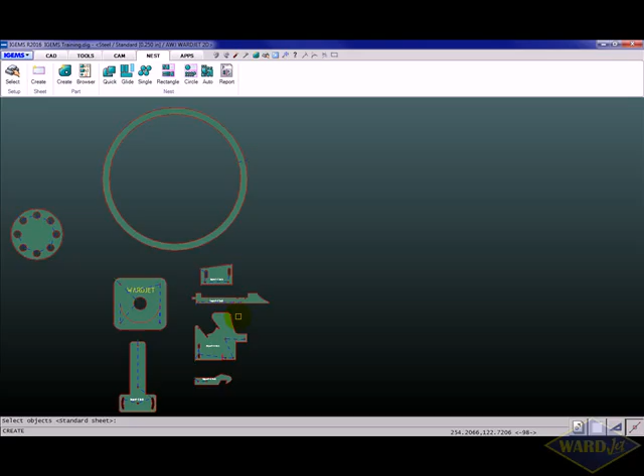Click on create, and down here at the bottom it's prompting me to select objects or press enter to pull up a list of available standard sheets. If I just hit enter, it'll bring up this little dialog box here showing whatever rectangular sheets I've already defined.

If you want to add a new size, just click on the plus sign and type in the dimensions, and then it'll be in that list there. So if we want to use a 48 by 96-inch sheet, we can click on that and OK.

Then you can type in information about the name for tracking it, and collar width, so if you want to leave material around the edge of the sheet to allow for clamps all around the sheet, you can set that there.

This use clamp zones box, if checked, can leave additional material on one edge or multiple edges if you need additional room for clamping. The size of this clamp zone is defined in the machine settings file.

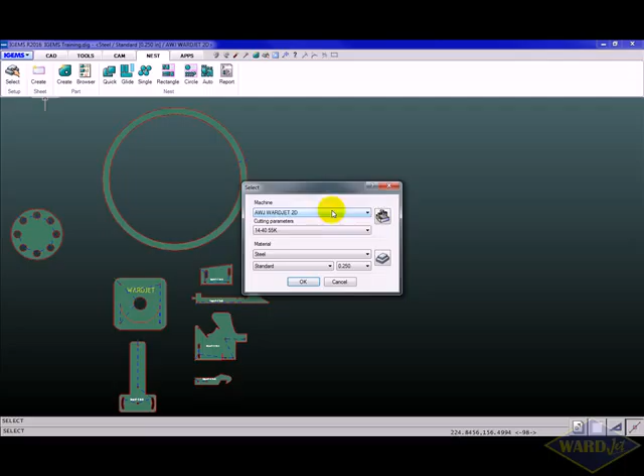So if we just cancel out of here for right now and go back to the machine, click on the machine settings, edit machine button here. On this first selection, table layout, if you scroll down a bit, you've got this area for clamp zones.

If you always want to default to using clamp zones, you can check that box here, or if you typically don't want to use it, you can uncheck it and always check it later. Then you can specify left, right, top, bottom clamping zones. That gives you a little bit more flexibility if you need more room, just maybe on the left and right edges of the sheet for clamping.

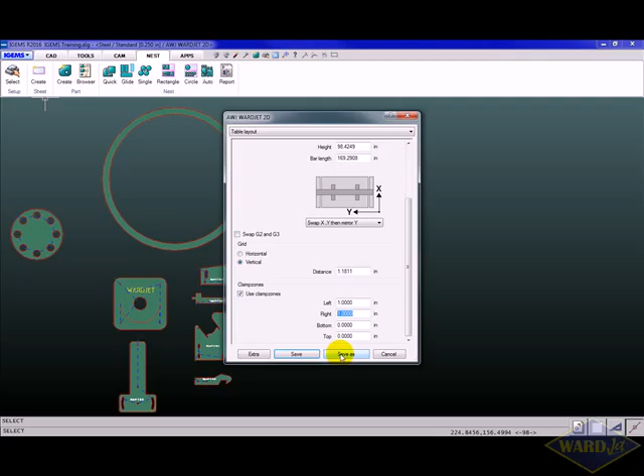So that's where that is. If we go back to our create sheet again, hit enter, 48 by 96 sheet. So collar width, we talked about clamp zones.

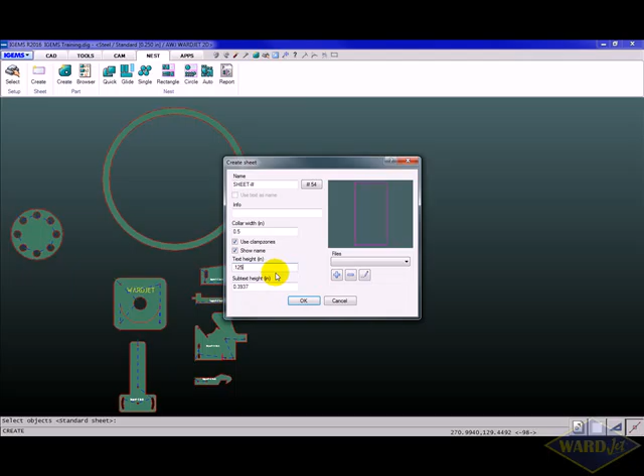Show name, it'll use this name when it does the nest, and you'll be able to see it on the screen so you can identify which is which. Then you can set the size of the text that it shows there. Then you can just click on OK, and now it's showing the sheet.

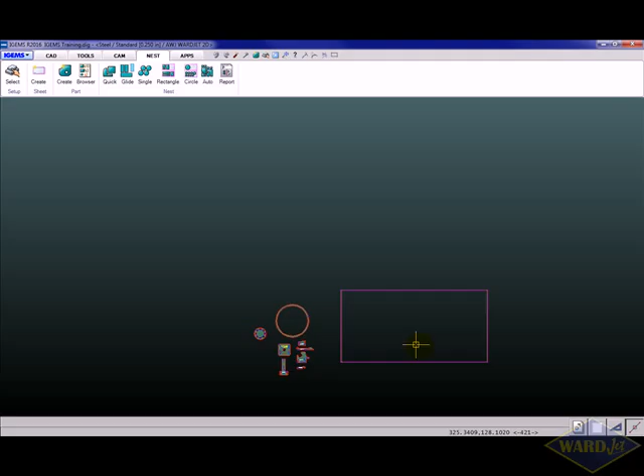If I left click, and then move my mouse around, it'll change the orientation of the sheet on the screen. You generally want this to correspond with how it would be laying on your table. So I'll just left click at this point here, so the sheet will be left to right on the table. That's one way of defining a sheet.

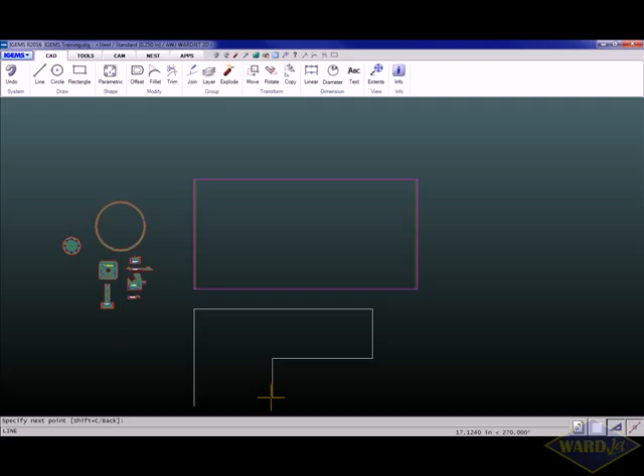You can also draw what a sheet looks like. If you have a remnant piece of material, you can just draw that out. So I'll just rough in something here. If I've got a piece of material that looks something like this, we'll just close that up here.

These do have to be joined together as one entity, so I'm just going to select all of these and use my join command, tolerance of 0, just hit enter. Now when I click on this, this is all one entity.

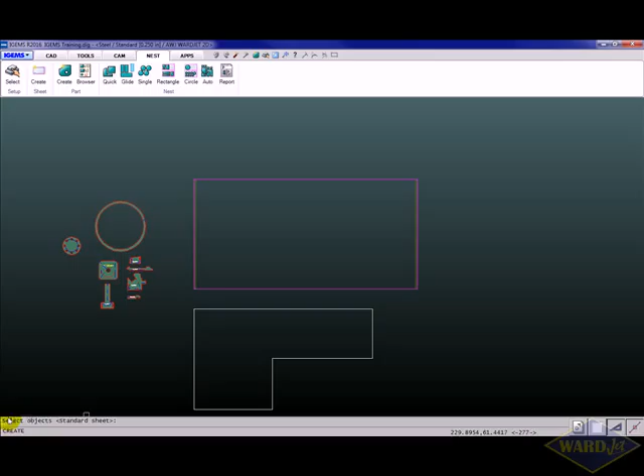If I go back to the nest tab, click on create again, this time instead of hitting enter to list the standard sheets we looked at, I'm going to do select objects, so I can just click on this and hit enter, and then again it brings up this dialog box where you can again make these different selections here.

So these are in pink, those represent sheets. If you think you're going to need more than one sheet, you can just use your copy command and put multiple sheets on the screen.

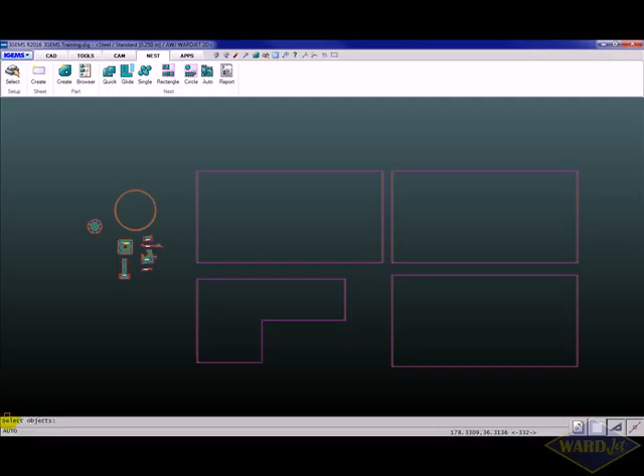For the nesting, you've got various options here: quick, glide, single, rectangle, circle. You should have the auto nest option typically, and that's the one most people just use. Just click on auto, and then down here at the bottom it's asking to select objects, so I can just drag a box around the pieces and hit enter, and then it'll bring up this window here. It's got the files, and how many pieces are going to be nested.

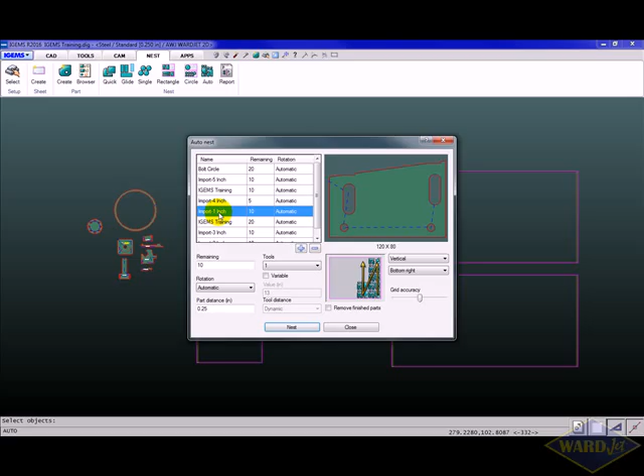If you decide at this point that you want more or less of these, down here in the remaining box, you can just change your quantity. If you want to change multiples, use your control or shift keys to select multiple files. So if we decide we want 15 of those, we can change that.

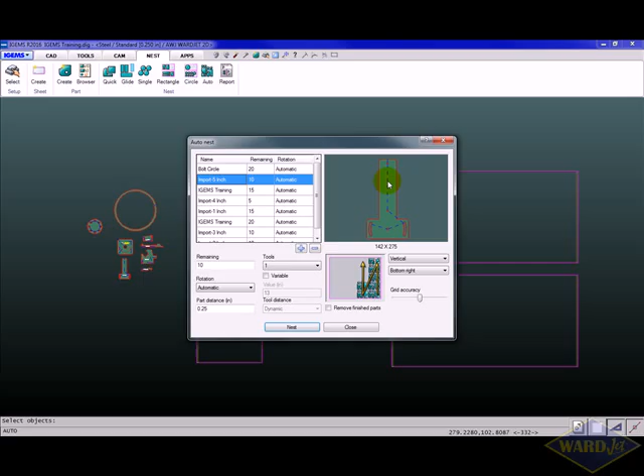You've got your rotation options, so if you've got a part that has to be oriented on the sheet in a certain area because of grain direction, and maybe this part we always want oriented this way, you've got this rotation selection, so we could say we'll do a 180 rotation, which will allow it to go this way on the sheet or spin around 180. So you've got those different options there.

Some things, like if it's just a circle, to save a little bit of nesting time, you could just set the rotation to none since it may not matter. But depending on where the lead-in is, if the lead-in's at like a 3 o'clock position, then you might want to do rotation. So you've got all sorts of different options there that you can choose from.

And then you've got your distance between your parts, so you can adjust that as you see fit based on the material and the thickness of the material and such. If you have multiple cutting heads on the machine, you can select how many cutting heads you want to use. We'll get into that in a little bit more detail in a different video.

And then you've got your options as far as how you want to nest the parts on the sheet. With a Waterjet machine, we typically have the 0,0 at the bottom right hand corner. So you can either start bottom right and work zigzag up and down. If you click on this image, it'll go through the different options you can use to nest the parts onto the sheet. So we'll go with this one here.

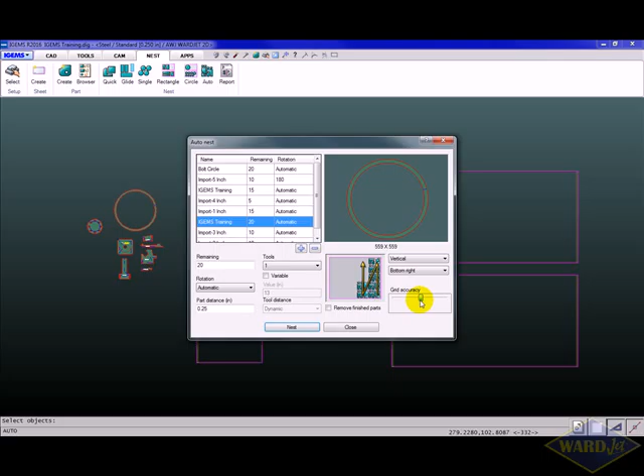Grid accuracy, if it's further to the right, it'll take basically finer slices of that sheet as it's doing it, and the nesting might take a little bit longer. You can generally just leave that in the middle there, and then click on Nest.

And now at the bottom it's saying select sheets and obstacles, so then you can just select the different sheets, hit enter, and it'll start going through and doing the optimization. So wherever possible, it'll put parts within parts within parts if the parts are small enough and the openings are big enough. So it'll give us information here about how many parts it nested.

This is a listing of all the different permutations it's gone through. So if you saw a nesting layout earlier in the cycle that you wanted to go back to, you can always select it from the list here.

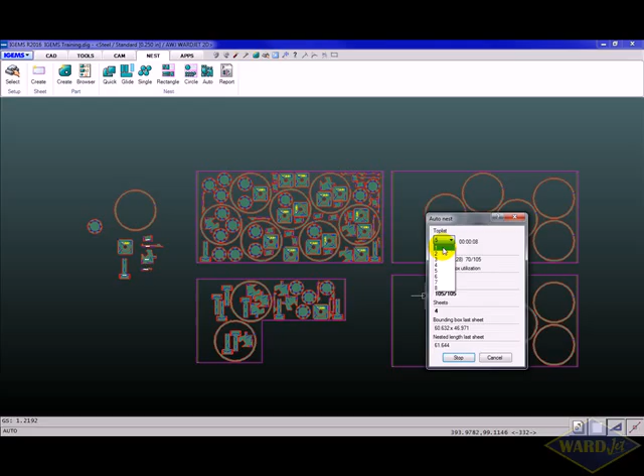So you can let this go for quite a while. Once you've got it how you like it, you can click on the stop button and then click on OK, and it'll bring you back to the screen here. So then we can see in this column, we've got 5 of those left.

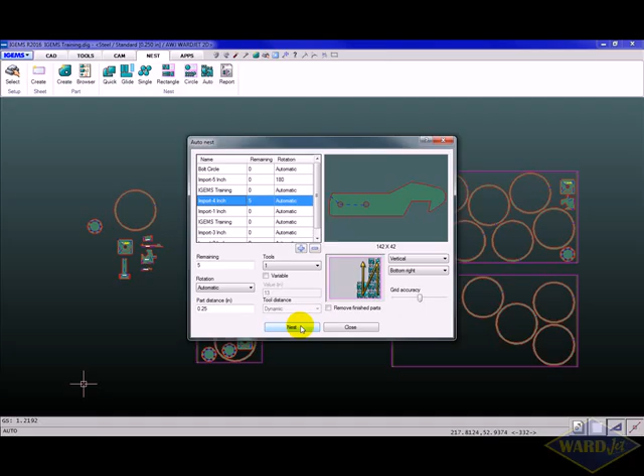Let's see, so if we hit nest again, let's see if it'll get those onto the sheet. So looks like it did get them on there now. And so now we've got everything nested, and then you can hit the close button here.

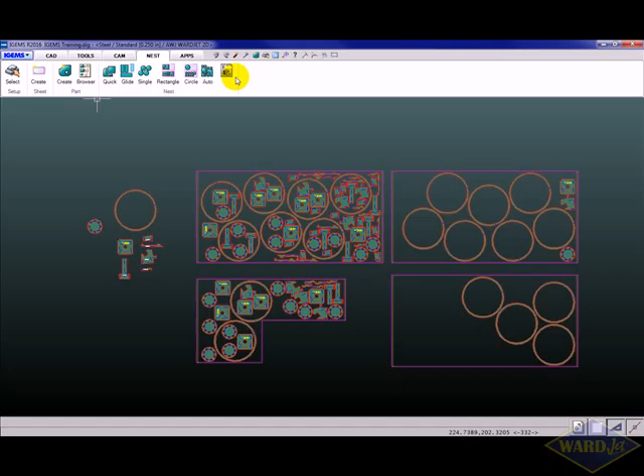Brings us back to here. So you can click on this report button up here. This will show a listing of all the parts and how many were nested. So this part here, the text is in green, indicating that it nested 10 out of 10.

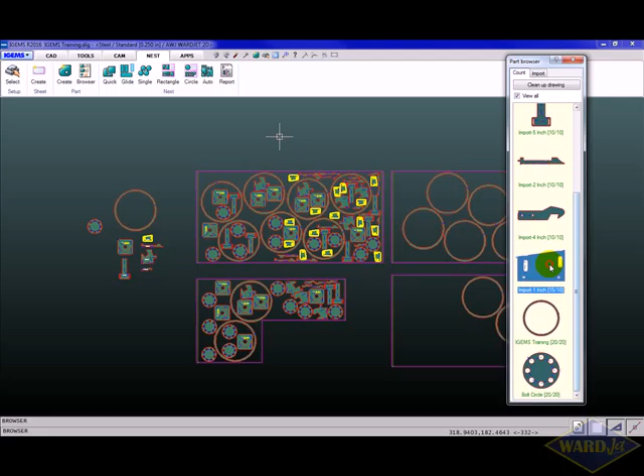Here it's in red because it nested more than what we had originally for the quantity. So it nested 15, and originally we had wanted 10 of those. If you click on the part, it'll show you where the part is in the nest, and click on cleanup drawing, and it'll make those parts basically disappear from the drawing and just show you what's left, what hasn't been nested.

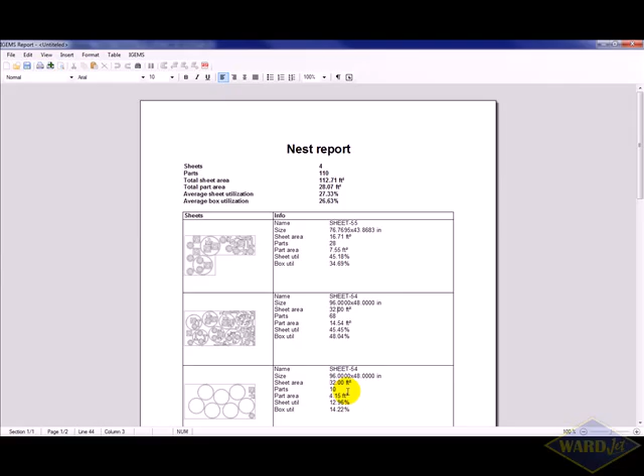So that's the part browser. Let me get those parts back there. And there's also the report button that you can click on, so then you can select the various sheets and hit enter, and it'll generate a little report and show you the name of the sheets and size of the sheets and how much of the material was used.

You can also lock out a sheet, so maybe like this sheet down here where we've only used a relatively small amount of the material, we can lock that sheet and use it later. So if you go to the sheet submenu and click on the lock button, and then we can drag a box around that sheet, and then it'll recognize where we've cut parts out of that sheet, and then if you wanted to nest additional parts later.

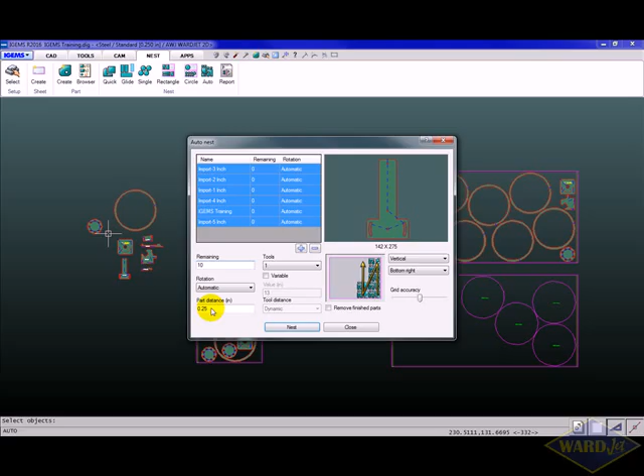So if we go back to auto, and we'll just select these pieces again, and I'm just going to specify 10 for all of these here, and tab out of there, and then nest, and then select the sheet, so now it recognizes that you can't cut anything in those areas, and then it'll put those parts onto the sheet.

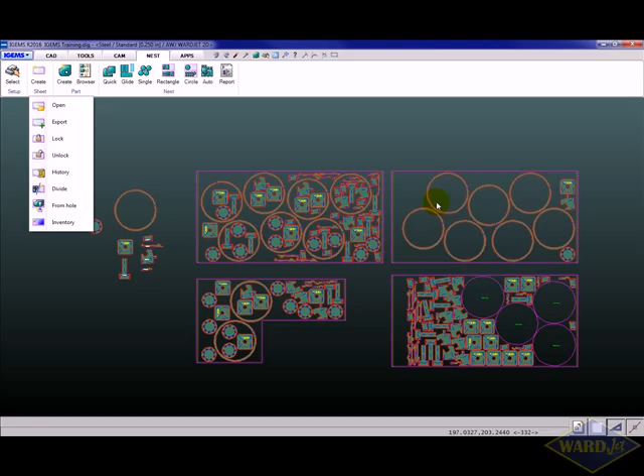And there's also the from hole option here, so if you have a large drop like in these circles left over, you can use this from hole command, and you can click on the inside of a circle like this and basically create a sheet out of that, so that's sometimes helpful.

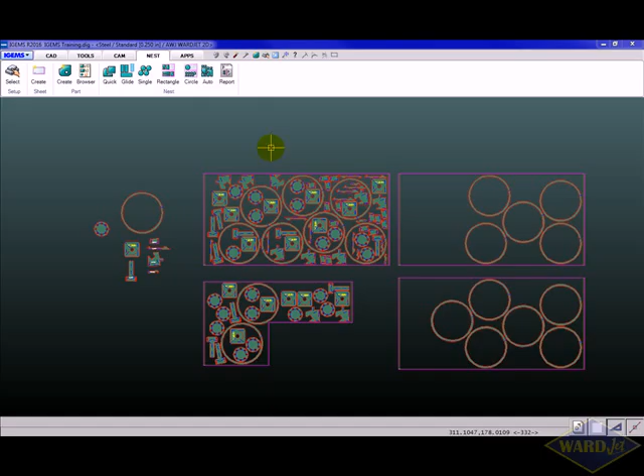Once you do have your nest the way that you like it, the next step would be to just add your zero point onto the sheets. So you can go back to the CAM tab and click on the order button, and then you can drag a box around the individual sheets here. So just do that one at a time, and then you can go through. This is the cut sequence on the sheet right now.

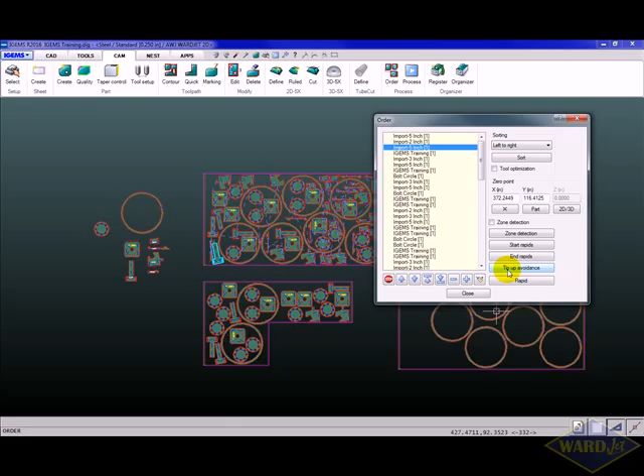If you wanted to change cut order, you can use these arrows here to move things up and down in the cut sequence. If you want to change the way it's working through the sheet, right now it's left to right. So if you want to change that, you can change that and click on sort. So you've got that. There's also tip-up avoidance in here, where if you click on that, it will try to find areas where the jet might be crossing over somewhere where it already cut. So we click on find collisions.

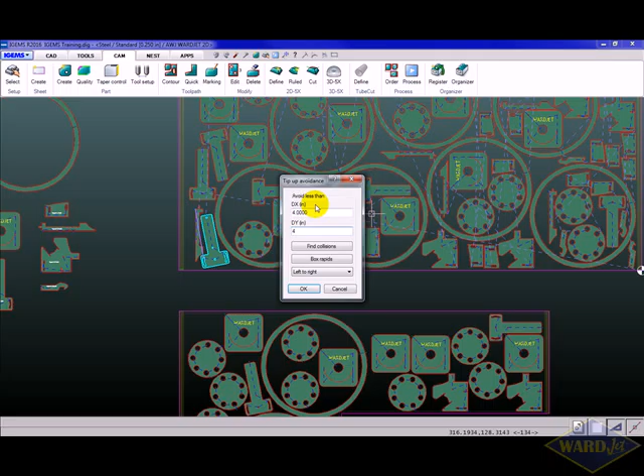On that sheet it didn't find any collisions, so let me bump this number up a little bit so we can find some collisions here. So basically this is the path that it's looking around the nozzle for potential areas that's crossing over other parts. And so okay, now it did find something. So basically what it's showing is that it's finishing this part, and then there's a traverse to come down to start this part here. So it's saying, well, there's a potential that maybe this part's gonna tip up.

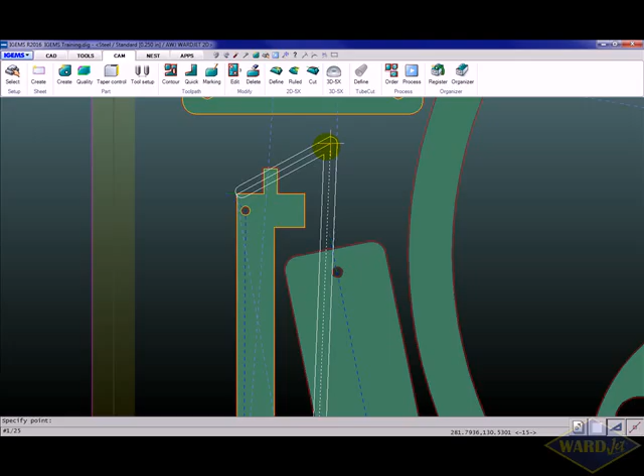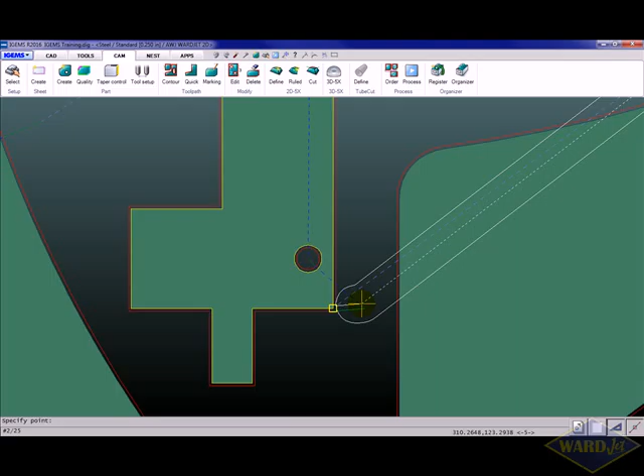And what you can do is you can just basically click and add additional traverse moves to get around that part. So you can click a couple times, and once you've got a rapid sequence that you like, you can just hit the space bar, and then it'll go through and find the next potential collision point. So here again, it's finishing that part, and it's coming over to this one here. And this one, I wouldn't worry about this because it hasn't even cut this part, so even if this part tipped up, it's moving away from it, so I just hit the space bar and go to the next one.

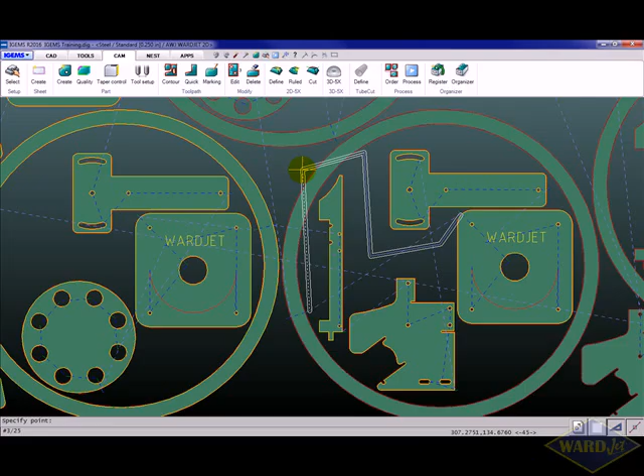Now this one, it's finishing this part, and then it's going to be traversing over to here to start this part. Now there's the potential that maybe this part had tipped up, so again, you could add some additional traversing to get around that. And if you have a machine that's got programmable Z, you could just use the programmable Z option and move up and down between parts. So here we'll click here and hit space. So you just kind of work your way through the sheet like this, and once it's done, then you can go on to the next sheet.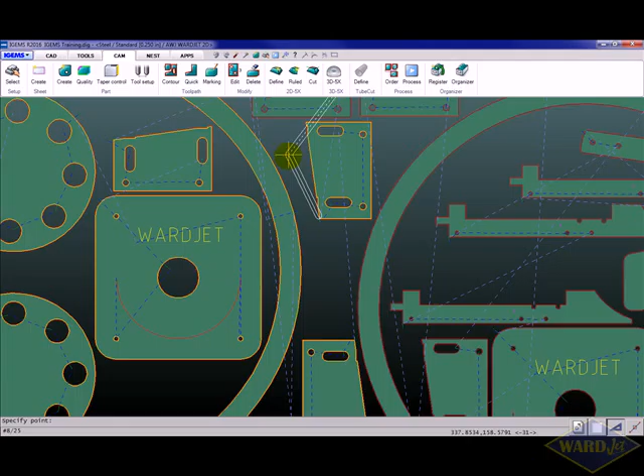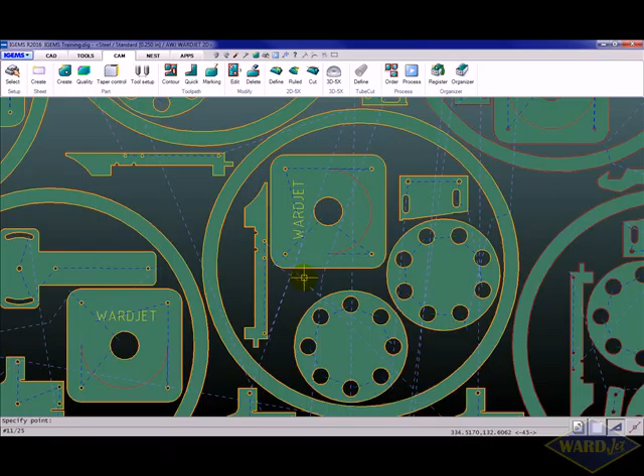So we'll just quickly finish this off here. Let's see, we'll put one in there, put one in there. Let's see, I guess we'll head up this way, space bar to get to the next one. So obviously, depending on the complexity of the nest, it might take a few minutes to go through this, but it can be time well spent to avoid breaking nozzles. Let's see, that shouldn't be a problem, so I'll just space bar through that one. We'll come over here, space, and we'll come down there. We can come back this way.

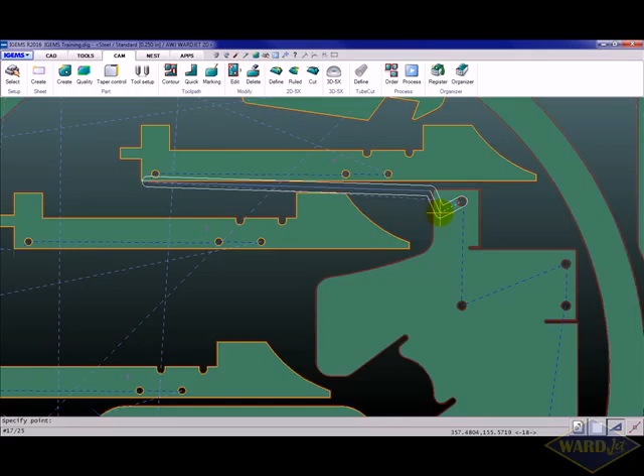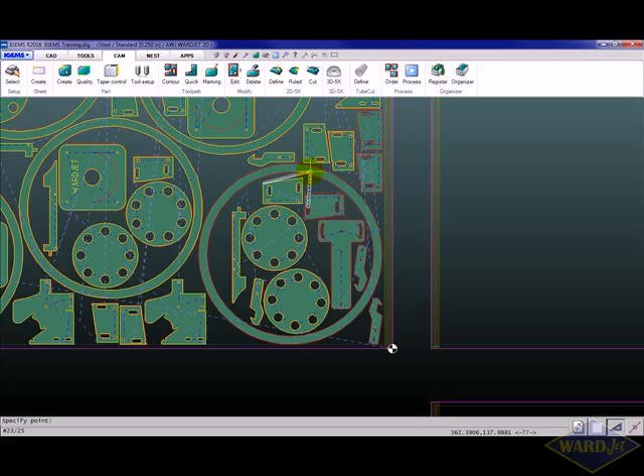And so sometimes there just may be situations where you can't avoid it. You'll just have to keep an eye on it. And let's see, so we're coming down here. So of course, if you are going to have clamps along the edge there, we'd want to avoid going that way, but kind of see if we can get through that way. This is obviously a pretty complex nest, so alright, that's done.

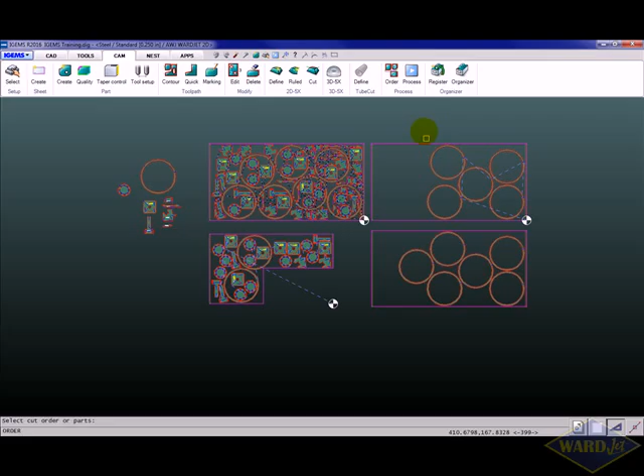And then you can do the same thing on the other nests again. Just click on your order button and you can go through that collision avoidance if you want to. And then once you've got your zero-zero set, then you can just go ahead and create your NC files. Try this again. There we go.